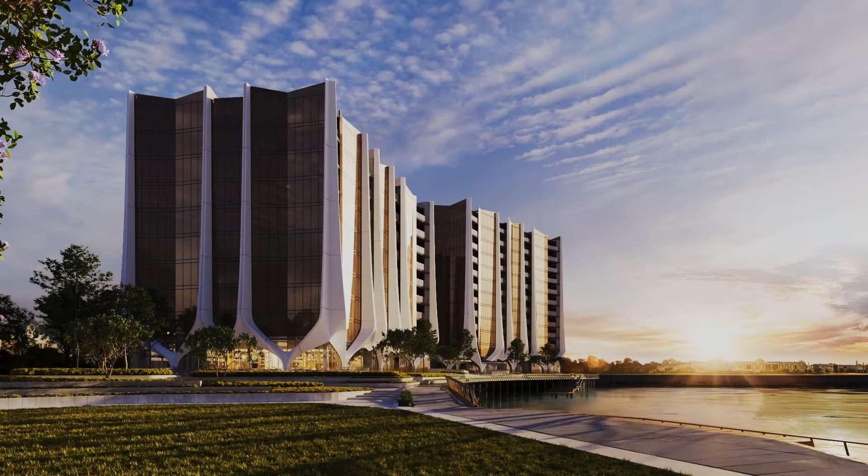Architecture naturally has reached a point where it can evolve and be a greater expression of art. What we're trying to do with architecture is that everything we do, every form we design has a reason for being there.

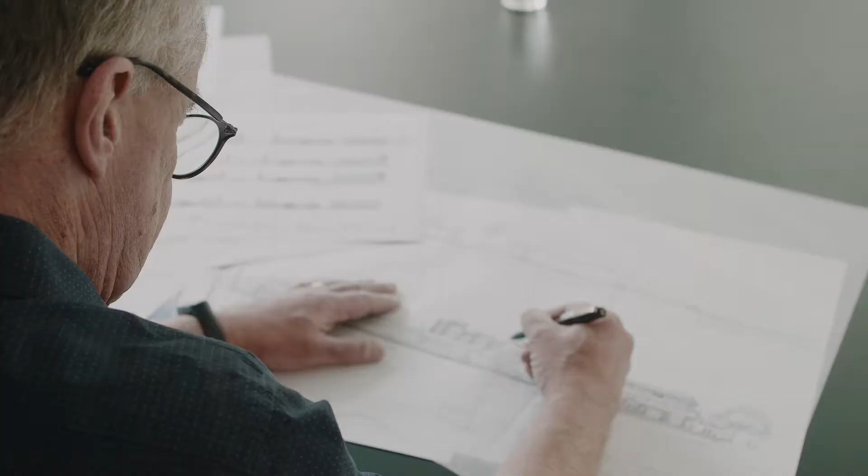So we're not trying to create an architecture that's very determined. It's an adaptive architecture where I think people, like in a village, will find their own way of enjoying it. With a project like The Lanes, that design thinking, or architecture as art as we call it, has really come to the fore, coupled with this sense of creating vibrancy and a greater sense of community life.

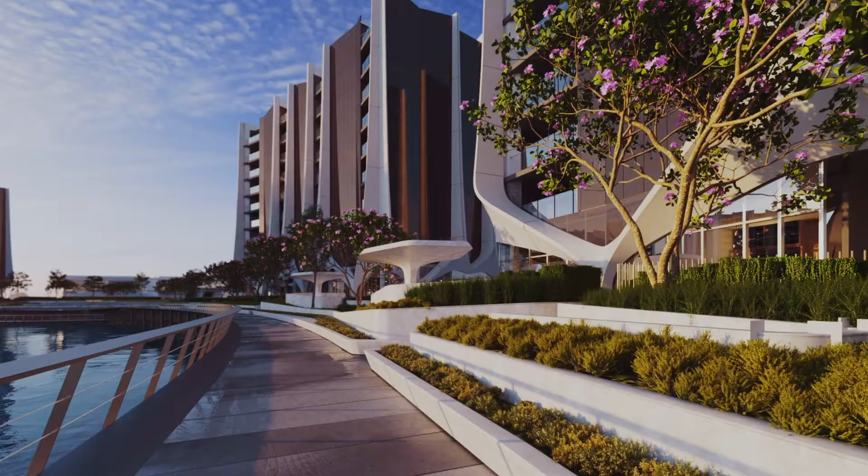The Lanes is situated within the center of the Gold Coast. Its proximity to all the amenity and all major infrastructure is second to none. When we look at the scale that we're creating, we're talking about thousands of residents. It needs to have its own sense of identity.

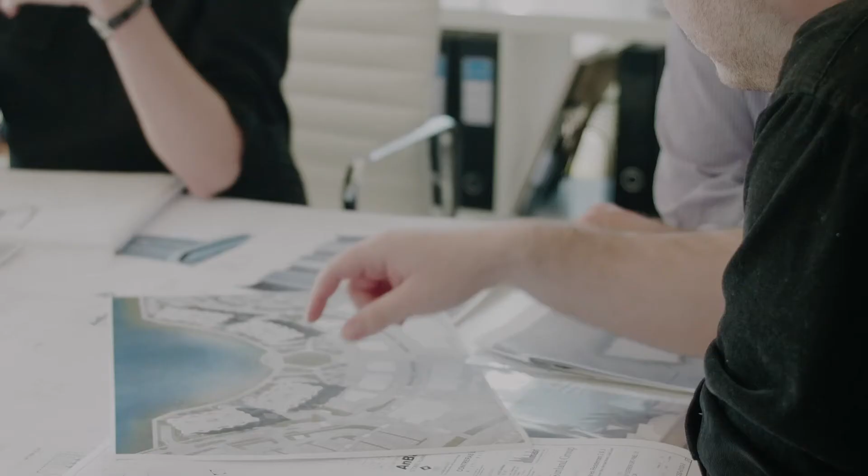The Lanes is something that we felt needs to embody a new interpretation or a renewal of the village concept. And so it's a very low scale, very open architecture and building forms that connect to the ground plane, interspersed with green space, and they actually enable the entirety of the community to come to the city center.

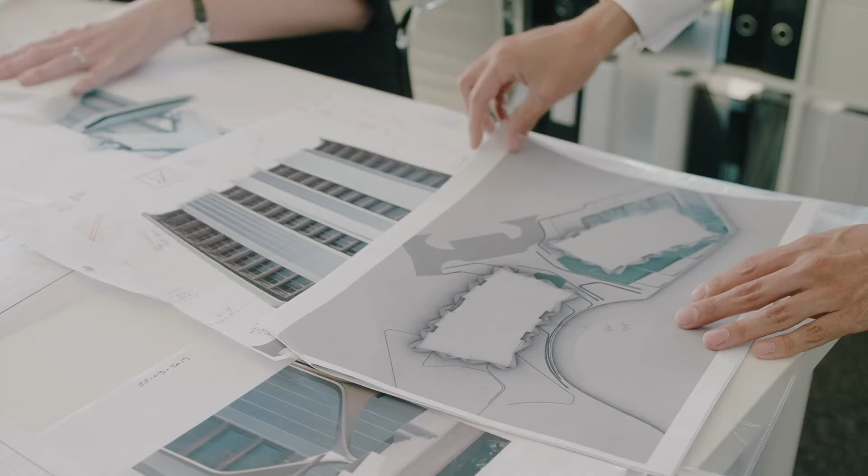It is creating a very interesting place for living. So having this very interesting retail precinct actually works in conjunction with the towers and creates like an ecosystem for that part of the city.

This shape that starts on the ground and kind of grows towards the sky are like objects that kind of mimic plant growth. At the same time, what it does is it articulates all the internal configuration of the apartment.

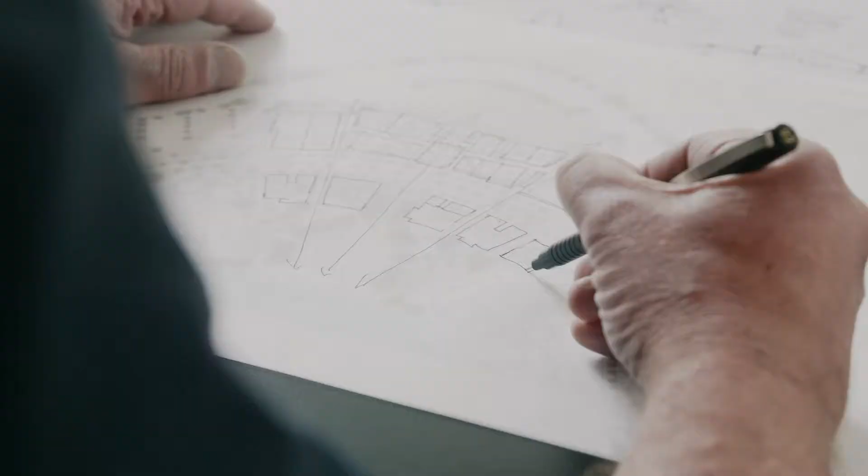Big, strong master planning element that came out of that is a linear sequence of open spaces that stretch all the way from the street front right through to the lake.

The village itself, like many villages, they have happenstance things occur in them. So not everything's kind of orchestrated in a kind of terribly deliberate way. There's a sort of lucky accident aspect of it.

So if people came here, they wouldn't just go to a restaurant and leave. There'd be an ability to explore and go around the lanes, look what's around the corner.

There's always this high-rise coastal fringe in the Gold Coast that drops very rapidly down to a single dwelling. So we see that there was a great potential on this site to have this new density, this mid-rise typology. And we see that could be a new urban pattern for living.

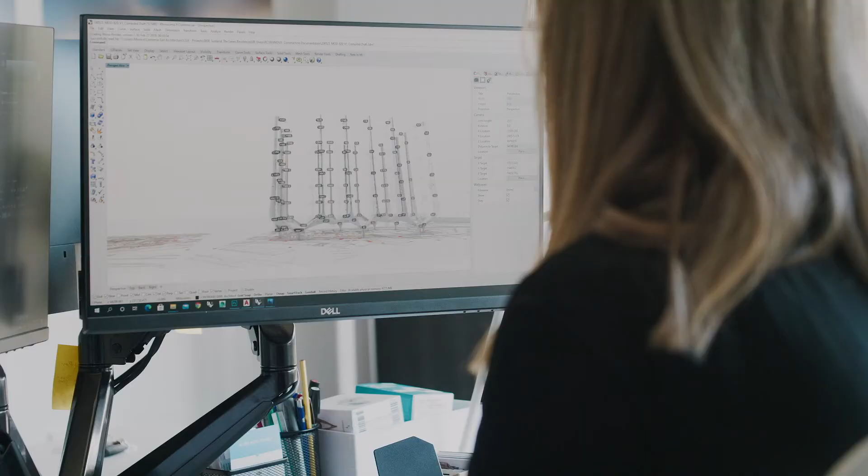Construction industry also needs to embrace technology to make it more efficient, to make it much more intelligent and clever. Of course, drawings have always been there, but with 3D software, we're able to communicate with different subcontractors very early on, get a lot of different information, a lot of input.

With technology, I think it'll be the enabler of very different lifestyles and very different forms of architecture. People will be wanting more nature around them. They'll want a sense in a densified city. Perhaps spaces aren't going to get lost, but there's more people trying to utilise those spaces.

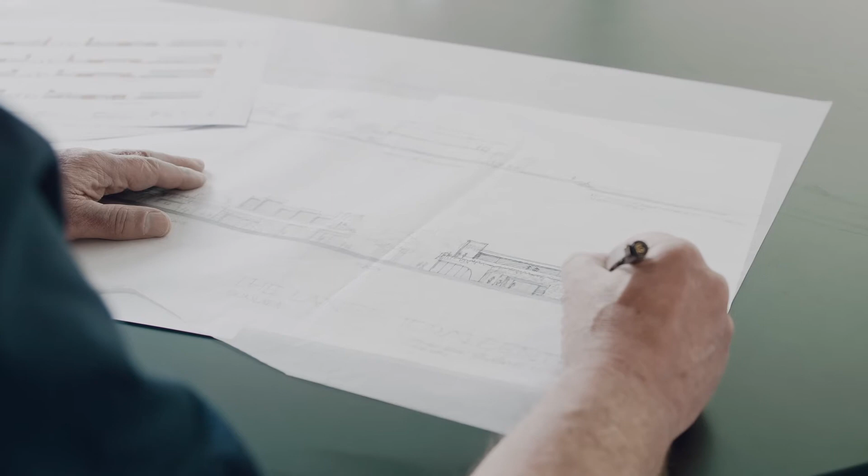Our hope is that the green space becomes a means of reconnecting the community together. Not only the residents, but the community of the Gold Coast has a sense to come and connect to it as well. And it becomes part of their community. It's their space.